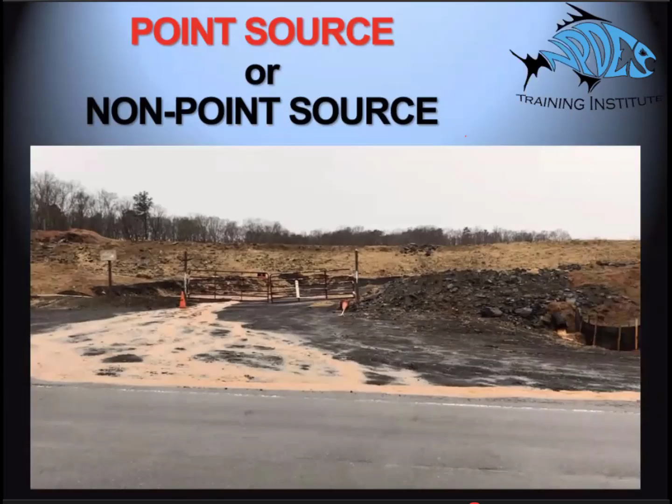Point source or non-point source. This obviously is a non-point source. Non-point sources are not required to file a notice of intent under the Clean Water Act if they have a land disturbance of 1 acre or greater when it's agricultural like this. But point sources absolutely do have that requirement. And yet we're seeing things like this, where discharges are leaving the site. This is just one of countless that I've videoed over the years. That's going down to a creek that will put that sediment into the Chattahoochee River, which takes it down to the next dam, Morgan Falls Dam. That sediment is building up and moving toward the dam as we speak. We're getting a rain event right now.

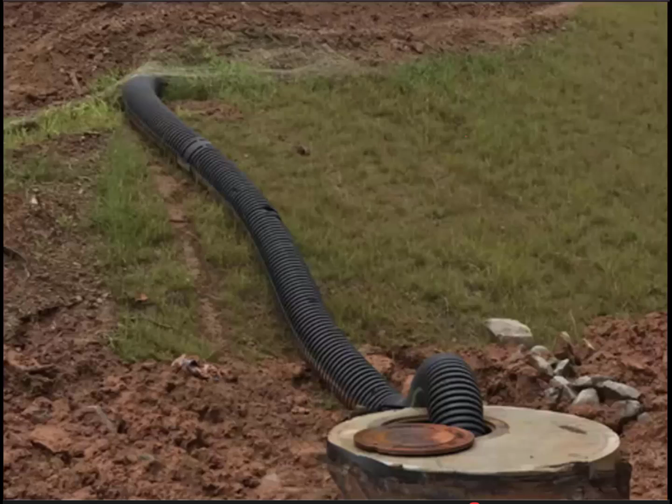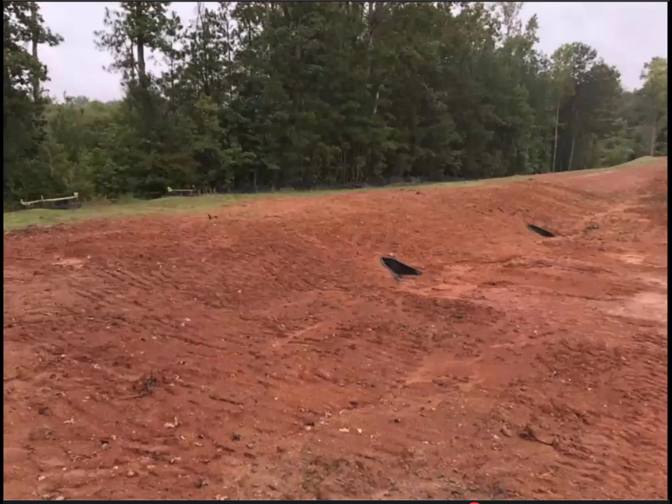So what causes a contractor, and we have to ask ourselves this as design professionals as well, to take a 35-acre site with sheet erosion and the volume of water into a temporary down drain and shove it down to a storm drain? Illegally, obviously. This is a point source of discharge. What causes a contractor, instead of putting the water into a sediment basin with an outlet protected with a retrofit, to just put a pipe in that takes it directly through the buffer and into the creek?

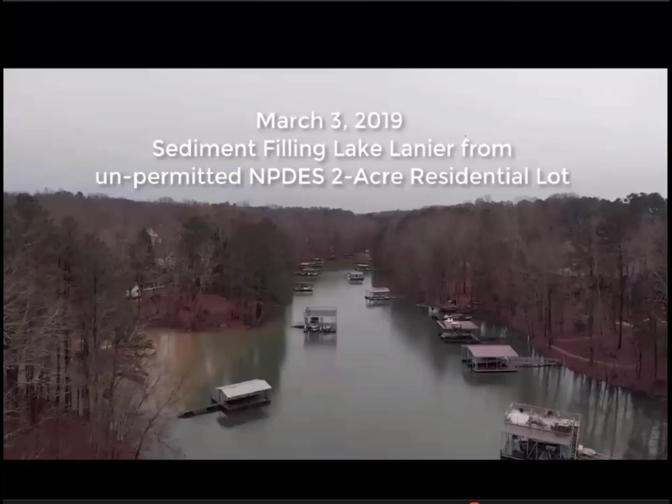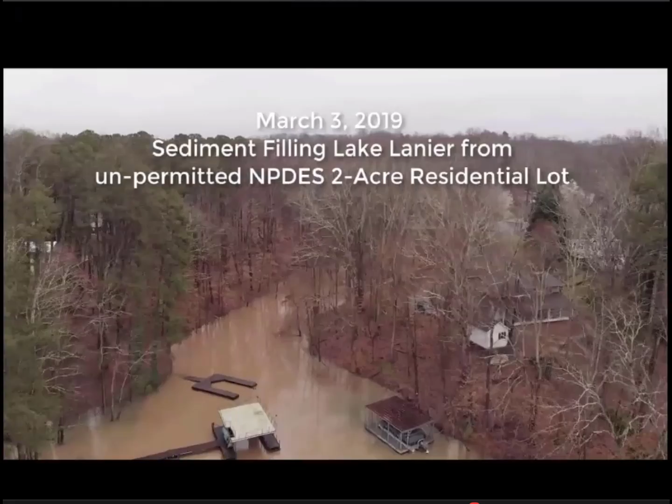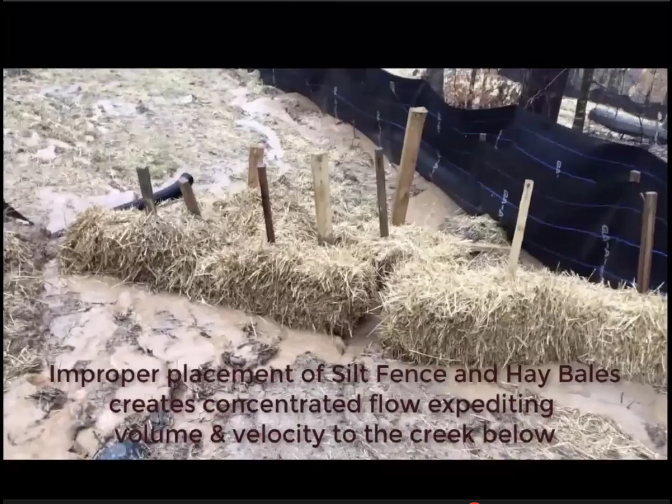What happened was the permittee was not really a permittee. He had gone down to the county, and they didn't even issue a land disturbing activity permit, when in fact they should have required a notice of intent to be filed. That would have required a design professional to be put in place, where even a sediment trap or two would have really helped resolve that issue. Of course, they all have to be maintained, and we'll talk about all that.

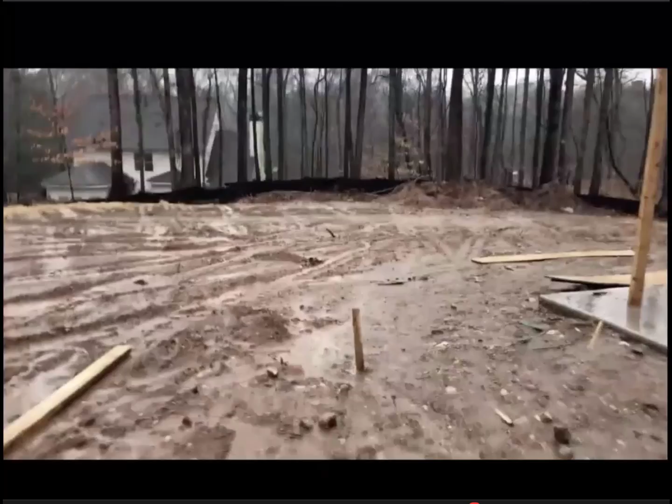But as you look at how even the best management practices were installed here, mulching was at one time over this area, and then of course it sheeted off. It was poorly anchored or not anchored at all. The sheet erosion, obviously, a lot of the sediment's already gone from here, but I kind of highlight that here. But then as that water comes off to the edge of the site, you notice the rills developing, and then the silt fence is channeling the water. And the creek downstream essentially just had no hope of trying to keep itself clean with this discharge. And of course, that all went into Lake Lanier.

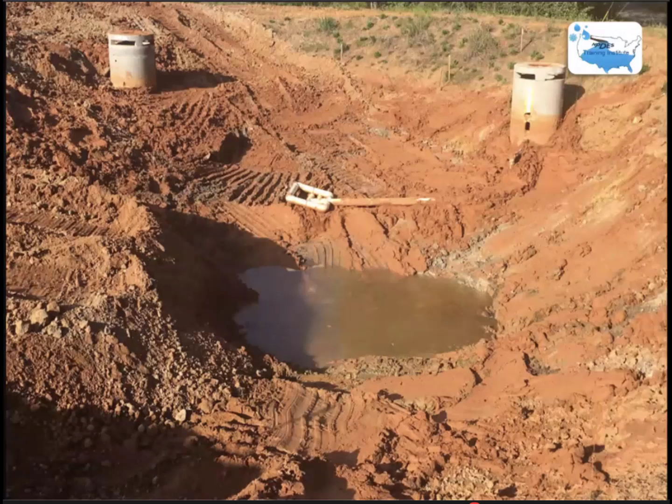So what is it that causes a contractor to do this? These are questions we think we know the answers to, but there's a lot of things that a superintendent is responsible for. And so, part of their responsibility also is to manage these sites as stormwater treatment systems, and lo and behold, they really don't know that.

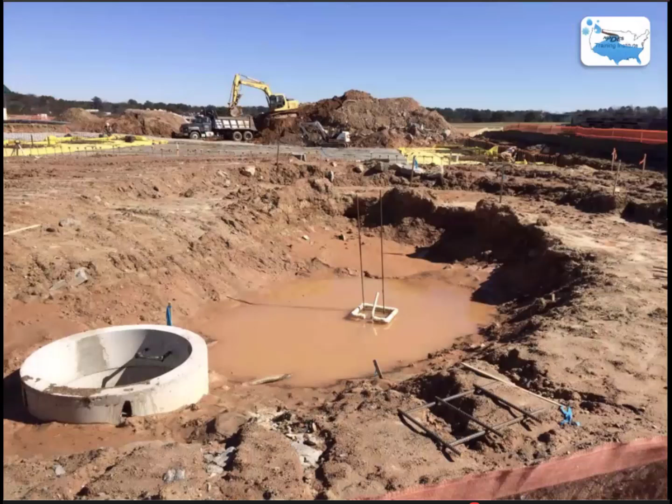So in this particular case, we have a surface skimmer that's installed in such a way that it couldn't possibly be maintained. If it's even operational at this point, it's doubtful. And of course, look at the erosion around it inside of the basin. It's just a rough way to look at trying to manage a skimmer.

So when you take a look at a shot like this of this lake, you can notice the lake in the background is real clear, but here it's full of sediment. And there's really no excuse in the Clean Water Act for this to have occurred.

And as I get to talking more about this, we have to look at construction sites kind of from an idealistic perspective. The Clean Water Act does not sympathize with, your construction schedule didn't work quite right this way, or if it's an industrial facility, there was an accidental discharge, we didn't change the filters out because the guy didn't show up for work last week, he was sick. The Clean Water Act is not sympathetic to that. And it really can't be, because it's people downstream that are the ones that suffer the consequences of this.

A stormwater treatment system, meaning that the notice of intent was filed for these projects, or should have been, meaning that the water hitting these jobs here should have been controlled in such a manner as to prevent that amount of sediment load from leaving them. So, of course, we're seeing a severe degradation of water quality there. And the people that live up in the upper reaches of these bays, their docks are sitting on sediment right now.

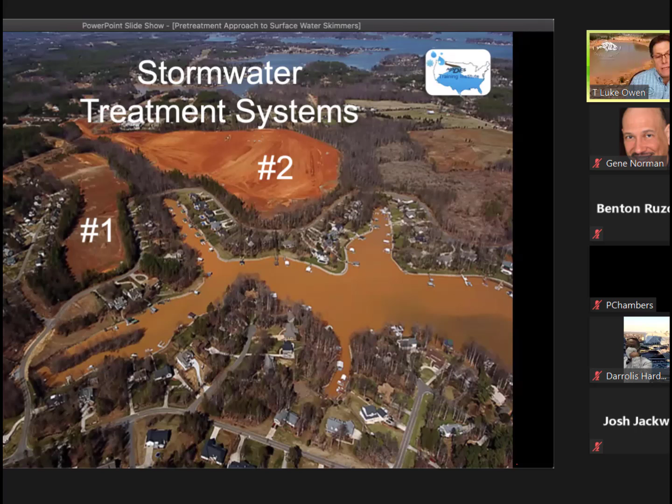So those are two point sources of pollution, where non-point sources like farming, agriculture, largely responsible for trash in a lot of our rivers and our creeks and our lakes in Georgia, for sure. But in metropolitan areas, I really wonder if sediment from non-point sources is our nation's number one problem. I really think in urbanized areas, from what I've seen, and I think you guys would agree, that sediment from point sources is our number one pollutant problem in urbanized areas in states like Georgia, where we get so much rain. And that's really a shame. It really shouldn't be like that.

But it takes training, it takes enforcement, it takes great designs, thoughtful designs that can be implemented in such a way to do more than just meet checklist items, that are going to consider the fact that 27,154 gallons of water are going to hit that construction site on 1 acre. And these are designed for 25-year events. We're talking about 6.7 inches of rain times that amount of water. That's an awful lot of water. So what can we do that's going to address that issue?

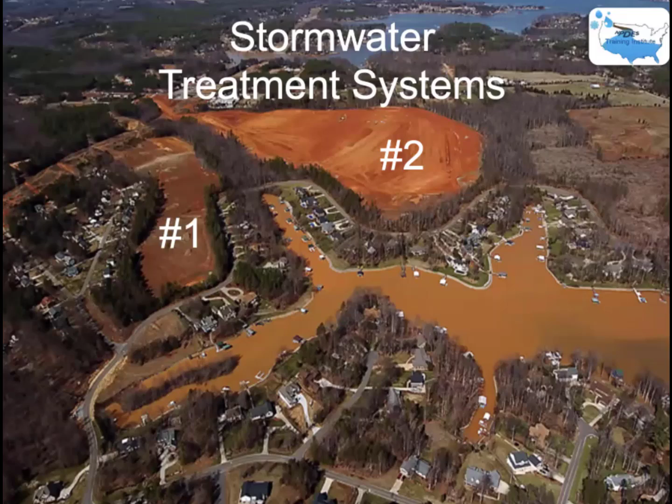And so what I found is that in the Clean Water Act, there is a program referred to as the pre-treatment approach to managing industrial discharges. And I worked on industrial facilities in that program for many, many years. And so it naturally just came to me when I first started this program, we need to start looking at things differently than we do right now with construction sites. So let's go back to the guidelines and start all the way from the federal government. I'll never forget, I was part of the meeting when we walked in the door of the stakeholders meeting for the general permit, and the NPDES said, surface skimmers are here.

What? And I said, what are they? And so here they are. Now they're written into our permits, and they're a federal requirement everywhere now in this country, unless they've been written specifically out for some unusual reason, which in the West, of course, they don't get that much rain there. But the federal law subpart B, construction and development effluent guidelines, come out of 40 CFR part 450, paragraph F.

And what Georgia did is we adopted those guidelines and we put those into our general permit as well, verbatim. So that text in orange says, when discharging from sediment basins and impoundments, permittees are required to utilize outlet structures that withdraw water from the surface unless infeasible. And the commission goes on to say, okay, well, if it's infeasible, it's not technologically or economically achievable, kind of streamline that a little bit.

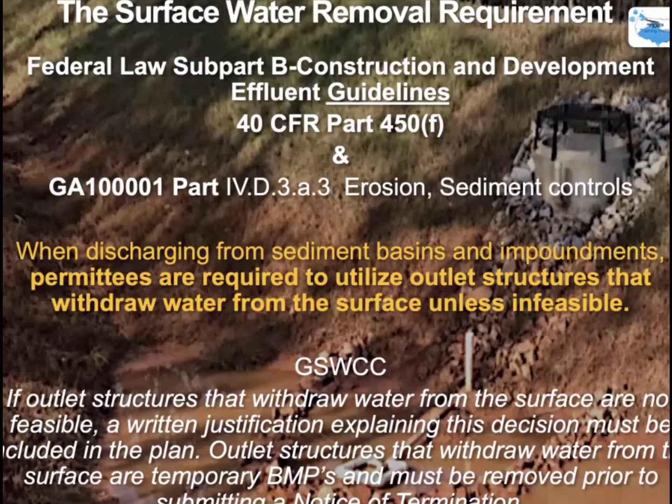So we have to kind of talk briefly about laws versus guidelines. You may have seen that the EPA issued these guidelines in federal law. And when you look at definitions, you really have to understand the difference between law, regulations, and guidelines, and how states adopt guidelines can become law.

By definition, following a guideline is never mandatory unless the state adopts guidelines that are issued by the federal government and requires them to be law. Guidelines are not binding and are not enforceable by law. Guidelines may be issued by an organization to make the actions of its employees or divisions more predictable and presumably of higher quality.

Now, I think surface water skimmers are an important thing to be properly designed, installed, and maintained on construction sites, given the amount of rain that Georgia gets. You know, 55 to 75 inches of rain a year. We have thousands and thousands of creeks and streams.

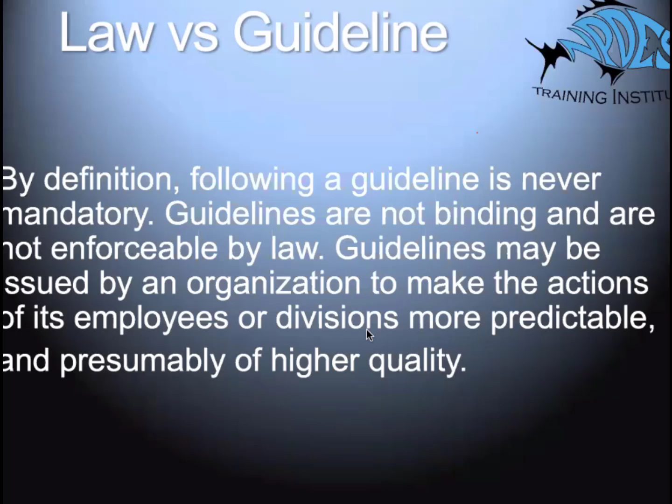I mean, when I moved here from Colorado, Utah, I had no idea what streams and creeks were until I moved here. And many people are born in this state in the Southeast. And as a result, we kind of take for granted the importance of having our streams and our creeks in good shape. We'll talk a little bit more about that later. But let's get into the definition.

A floating surface skimmer, by definition, coming right out of the Green Book, is a buoyant device that releases or drains water from the surface of sediment ponds, traps, or basins at a controlled rate. It skims or dewaters from the water surface where sediment concentrations are at a minimum in the water column instead of draining from the bottom where sediment concentrations are the highest.

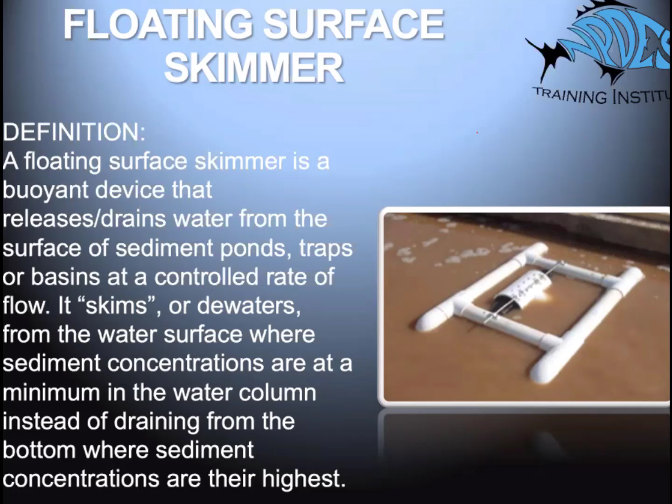Now, when you take a look at the general permit, by definition, this really isn't enough. We can see coming out of the Green Book the definition, the purpose, the conditions that skimmers are to work under, the design criteria. But in our general permit, we have a requirement for discharging to certain discharge limits. Now, this is not business as usual.

For you guys that come in from out of state or that have worked in other states, most states do not have discharge limits associated with construction sites. And of course, the federal government tried to require that a few years ago and they lost.

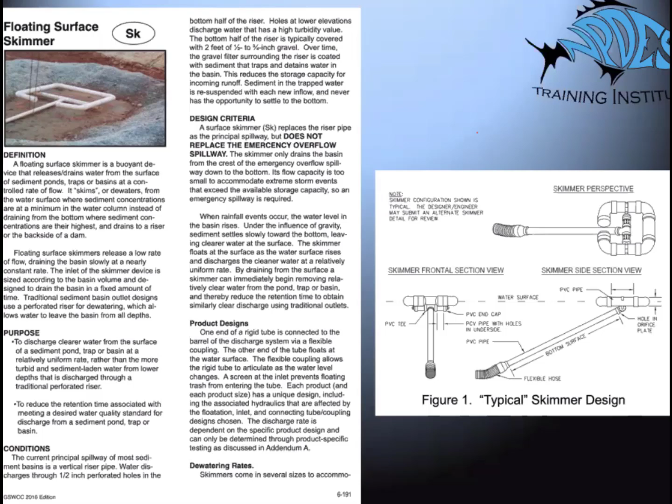But Georgia does have them, and they're kind of not really considered all that important because of how we essentially manage construction sites in a way that does not conform to managing them as stormwater treatment systems. It's really a difference in mindset that has to take place.

In the GAR 1 permit, I wanted to point out here that there are requirements for discharging to a certain limit. And I wanted to read just the first paragraph here. Basically, the first paragraph addresses discharging into a stream that's a trout stream or a warm water stream and measuring turbidity upstream and downstream of those discharges.

The secondary highlighted area there is the same basic verbiage, but addresses sampling from the actual outfall. So what I wanted to point out is in the second paragraph. It says, when the permittee has elected to sample outfalls, the discharge of stormwater runoff from disturbed areas where BMPs have not been properly designed, installed, and maintained shall constitute a separate violation.

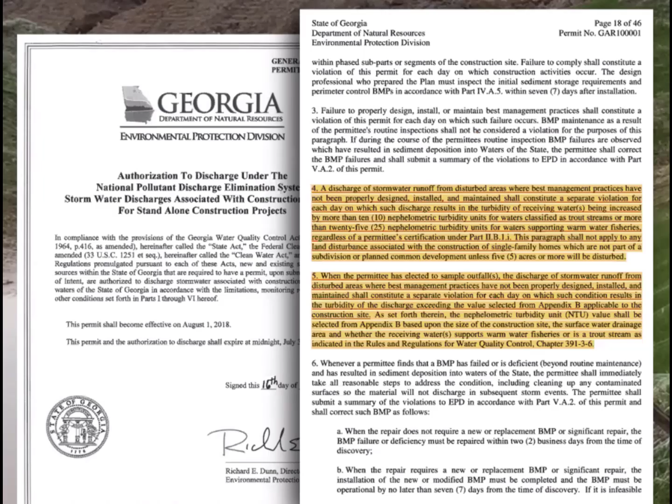For each day on which such conditions result in the turbidity of the discharge exceeding the value selected from Appendix B. And that's essentially the same again as I had mentioned about the 25 and 10 NTU discharges for trout streams.

I wanted to throw this up there. This is not a memorandum of agreement, but a memorandum that came out of the EPD back in 2009. And they address certain things, and it's worth a read.

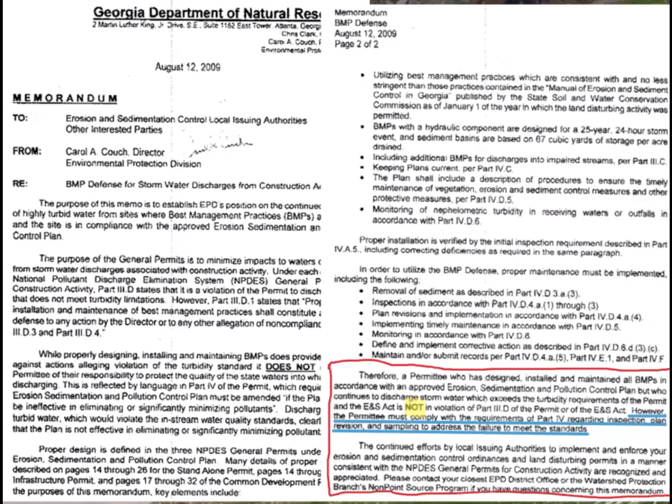Where am I going with all of this? I've put out several times in my newsletters, and I've gotten comments back from very well-seasoned professionals in the stormwater business that skimmers are not intended to discharge to a turbidity standard. And I would agree with that in every state that does not have a discharge limit. That said, as we get into the design, installation, and maintenance of skimmer devices, we have to consider in those installations the ability they have to discharge to a discharge limit.

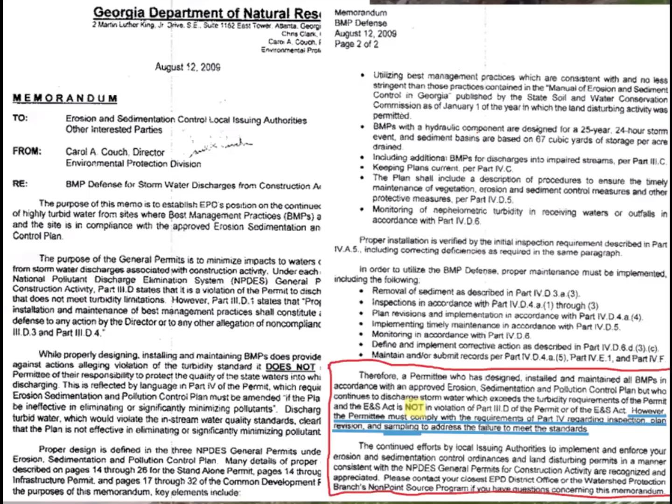That can only take place when you've got certain conditions happening and often would include flocculation. Now in the NPDES industrial world, that's absolutely a requirement, as you'll find out as we start talking more about the pre-treatment program here.

So here we have a skimmer that's not quite skimming from the surface. And here we have a highlight that comes out of the green book that says floating surface skimmers that sink or completely suspend under the water surface are not acceptable. Obviously, this particular skimmer also was inserted through a retrofit.

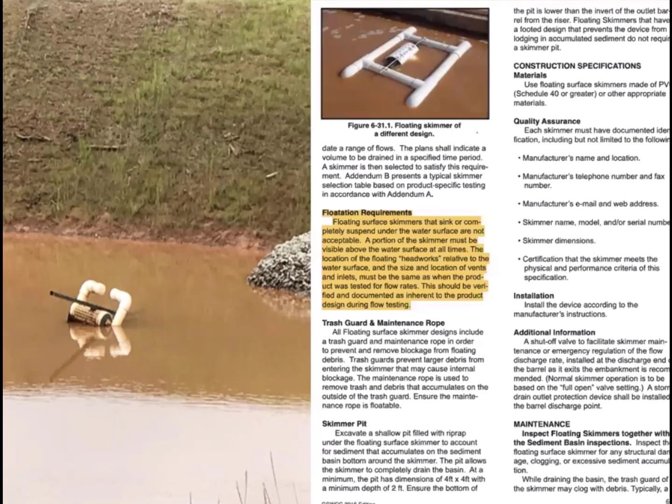There are contractors out there doing this now, and many municipalities are looking at it like, wow, that looks pretty sharp. As a matter of fact, a lot of our BMPs people look at when it's dry and fail to look at them like what's going to happen when they get wet. But where did the concept of pre-treatment come from? It came from the Clean Water Act.

And what happened with the Clean Water Act when it was amended in '72 to include NPDES permits, it had gone on for 25 years and put in water quality standards that nobody wanted to comply with, and there weren't any requirements to do so. So finally in '72, they amended it. A lot of language went into it, and the NPDES permit program was born. Its goals, which still apply today, are very fundamental to America's water quality.

I mean, we can go all the way into bass fishing tournaments. You can go into fly fishing that many of us love to do. And if we fail to comply with the Clean Water Act and take it seriously, understanding that sediment is the #1 pollutant for fish, we're talking about a chronic pollutant that can bury eggs and affect fish gills and breathing in the water, then we've got a problem.

So the #1 goal is to restore and maintain the chemical, physical, and biological integrity of our nation's waters. And that was true then, it's true today. And then we established the NPDES program, meaning the National Pollutant Discharge Elimination System program, that is there to establish standards, whether they're effluent discharge limits, water quality standards, or administrative, structural and non-structural controls that we actually have to put in place.

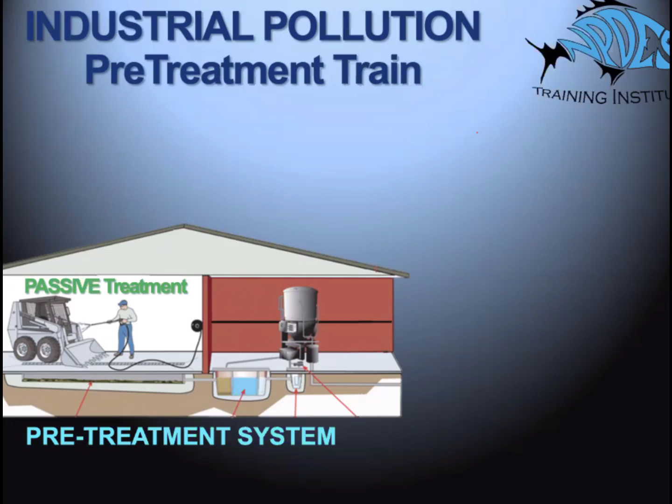So we're using gravity, we're putting things in place that are going to create a higher residence time of that water in the collection pit. You can see a three-stage, three-weir system there that finally will take that water down over to the active treatment system. Now that active treatment system cannot handle the water prior to it being passively treated.

It's impossible. We had the hardest time getting people to maintain these systems. We'd try to sell them the contract to maintain them. They wouldn't do it. They would want to do it themselves. Does that sound kind of familiar to construction sites? It's a human nature thing.

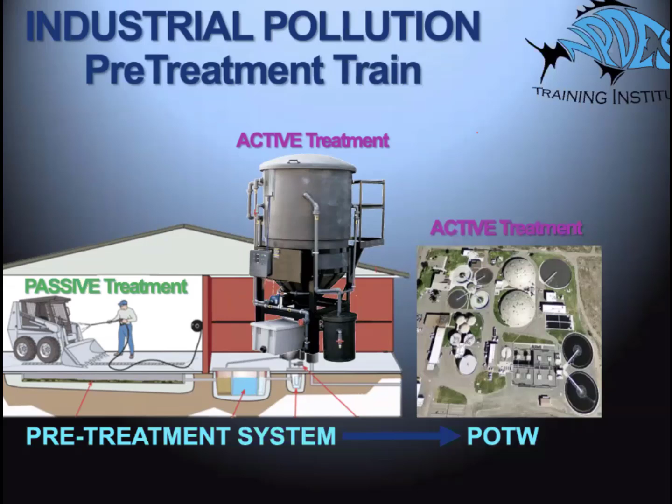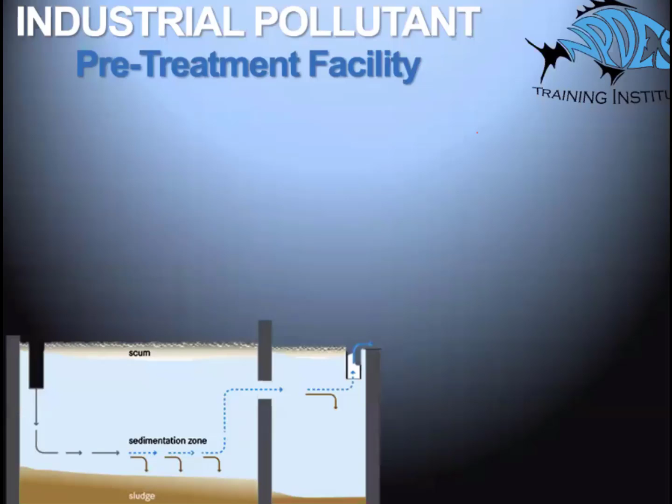So anyway, active treatment systems then flocculate, they filter, they use charcoal filtration to actually kill bacteria. And then from that point, they would discharge it to a wastewater treatment plant, and that would put the final scrub on it that would take it down to the state water or water of the US. Now, if you take a look at an industrial pre-treatment facility, we're talking passive treatment in the collection pit. Collection pits are passive settling tanks built to remove the bulk load of particles from liquid prior to active treatment clarification.

What does that resemble on a construction site? That resembles a sediment basin. That resembles a sediment trap. That resembles a collection area where the water has already got to be pre-treated. A large part of the sediment must be taken out if this thing's going to function properly. And it certainly has to be maintained.

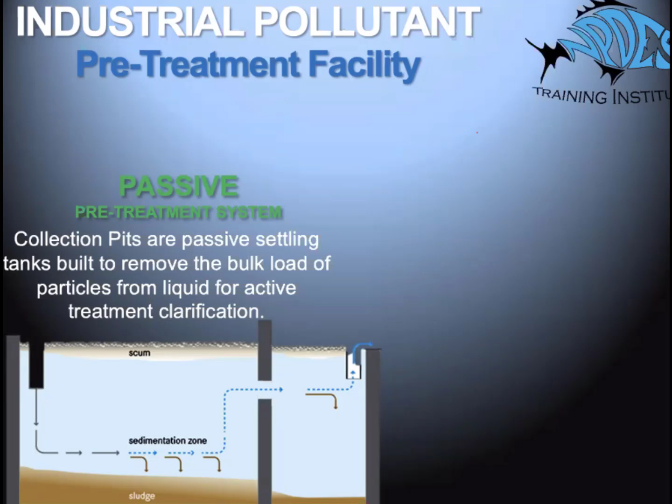When you're talking about the difference of a construction site and an industrial facility, you're talking about a massive difference in pollutant load. The entire floor of a construction site, if it's actually exposed and graded, is the pollutant of concern. And so it becomes incumbent upon the operator of these systems to prevent the erosion of that pollutant from entering the collection pit so quickly, or it simply overwhelms it. From that point on, of course, this is going to be taking it to an active treatment system, and construction sites don't have active treatment systems. Some do.

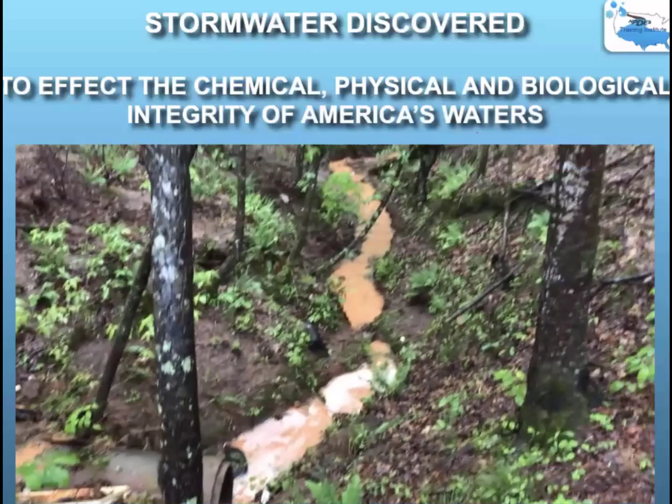But later on, stormwater was discovered to affect the chemical, physical, and biological integrity of our waterways. We have a little solid waste there, but now we have a huge pollutant load coming from a county road project upstream. So as time went on, after the Clean Water Act was amended to include very strict requirements for effluent discharges from wastewater treatment plants and industrial facilities, the EPA decided to study the effects of stormwater, since we realized that the chemical, physical, biological integrity of our nation's waters was not happening.

What happened early on with the Clean Water Act is they decided that it was just not reasonable with stormwater to require effluent discharge limits. And many states in the very beginning, as they're trying to get their arms around all these new requirements, some required water sampling, others didn't. And since then, some have because of active environmental groups and things like that. But for the most part over the country, we really don't require discharge limits.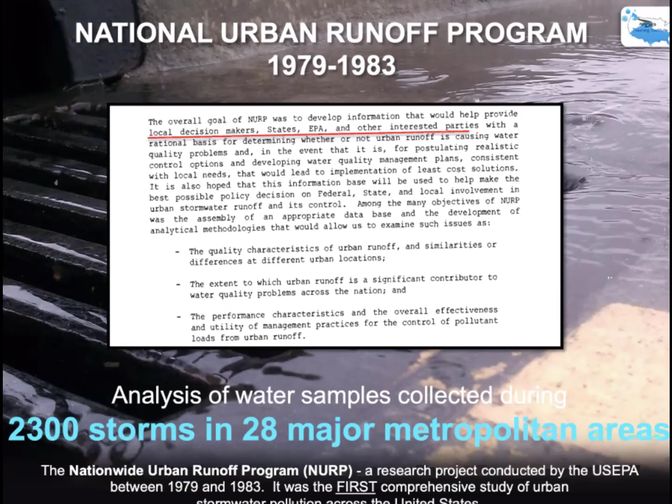But we do require that best management practices are properly designed, installed, and maintained, and that there's proof that that has taken place. That's really what is taking the place of sampling water outside of Georgia. Now, those are still integrally critical in Georgia, but not the only thing. We still have to discharge at a certain limit if we're going to meet our permit requirement.

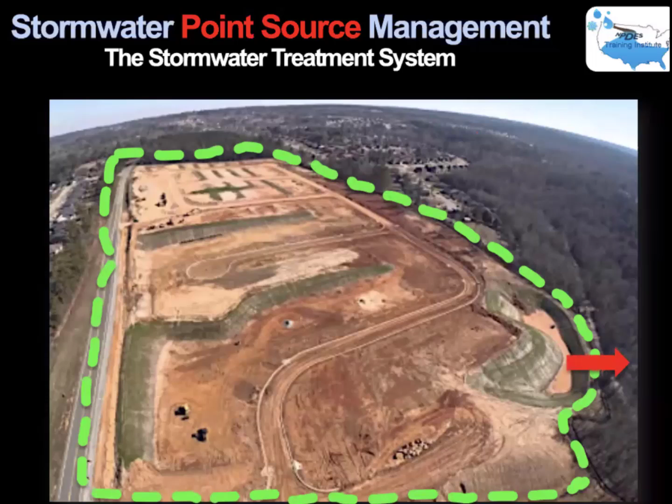And so it's a point source, and how Georgia manages those is to look at this construction site as a point source of pollution, meaning that there's only one legal discharge point on it. The operator managing this is where Georgia goes above and beyond with its certification requirements. Not just inspectors are required to have a blue card, but the people with the financial decision-making capability of calling in an erosion control contractor have those responsibilities to have a blue card. Then people that do site inspections obviously do too.

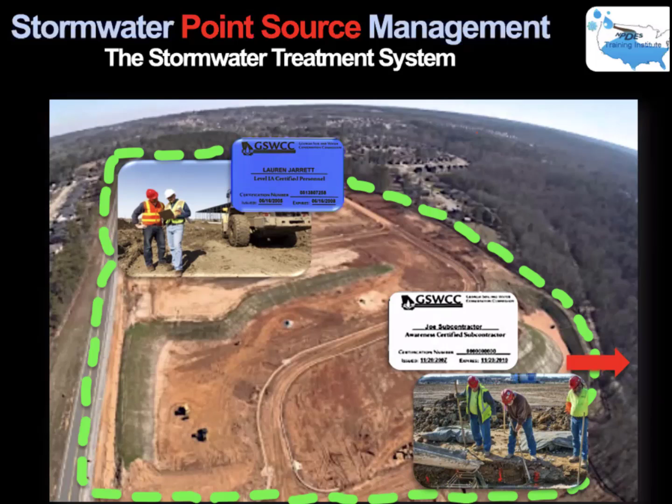And then the subcontractors, they came out a few years after the initial certification program, and that really says, okay, subs, you don't need to know about all this NPDES stuff. You don't need to be doing water sampling and site inspections. You just need to be aware of the damage you're going to be causing to water quality if your activities strip a buffer, or if you don't properly install your BMPs for your contractor. So one person per crew has to have a white card.

Then the red cards come along. They take the same course modules as the blue cards, but they get a little extra because they're regulatory inspectors. Where the blue cards are compliance inspectors, red cards are regulatory inspectors. Most of you guys know this, but there still is a lot of misinformation out there. So anyway, this would be somebody working for a county or a city or the Georgia Environmental Protection Division that is doing enforcement and making sure the site inspections are taking place, the water sampling is taking place, that the reportable violations are being reported, those types of things.

And then, actually fundamental to all of this is the design and the checklist requirements that Georgia has, which are pretty amazing compared to most other states. So here in Georgia, we allow not just professional engineers and CPESC certified professionals in erosion and sediment control to design plans. We also allow those low-life geologists like me and landscape architects, land surveyors, and foresters to actually design plans.

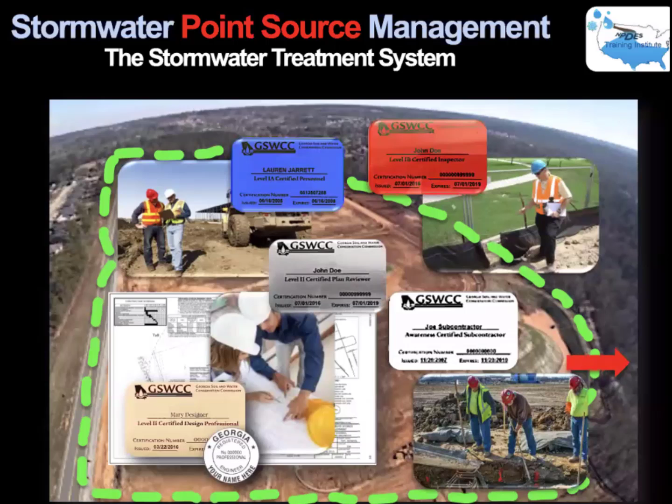And then, of course, plans many times go into plan reviewers. They take the same class. That course takes the same stuff as a level 1A card certified person gets, but they get more in terms of stormwater management, post-construction stormwater management issues. Of course, green infrastructure now is an MS4 requirement, so we learn a little bit about that. And of course, the checklists that we go into, and how to use the BMPs and add BMPs that we want to use on our sites.

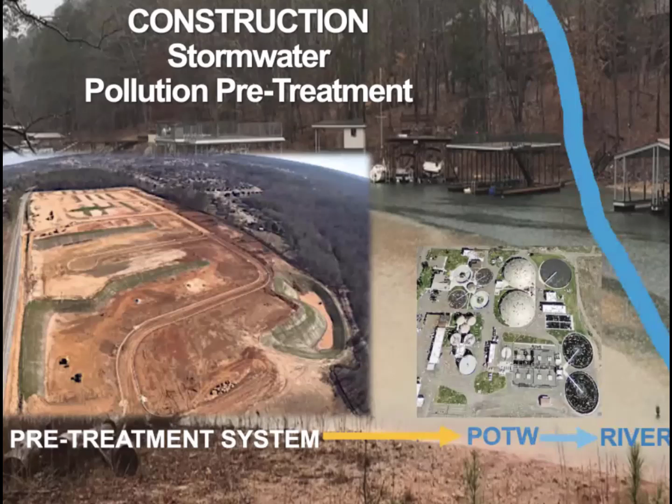So at this point, we're going to start going through the pre-treatment program for construction sites. And of course, we all know that the effluent leaving this site now does not go down to a POTW. It goes directly to the river. So how are we going to pre-treat the water on this construction site in such a manner as understanding it's its last point of discharge? That sediment basin is really to be looked at kind of like a POTW. That's its last treatment point of discharge.

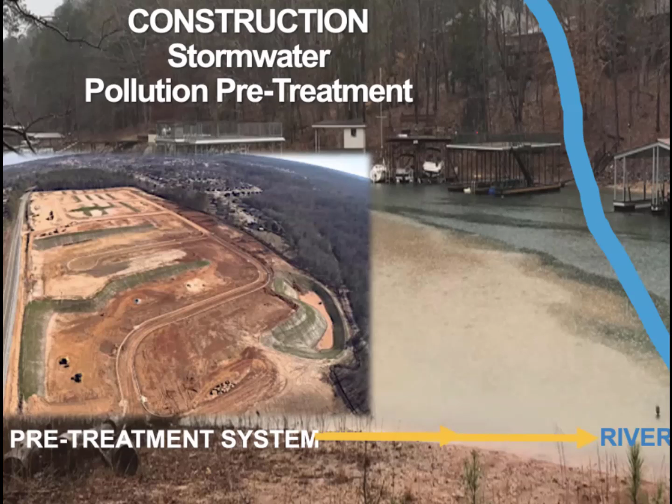What can we do that's going to pre-treat that water to a point where a skimmer could actually work, or maybe even just a retrofit, something that will actually be responsible for discharging water at an acceptable discharge limit? So here we have our challenges on construction sites. We have the increased runoff volume we've got to contend with that industrial facilities don't have to deal with. We have that increased runoff velocity, and we have that increased pollutant load that goes with it. Now, the pollutant load is what people get in trouble for. But these two troublemakers up here in front are the ones that really cause it to be such an issue.

So in our designs, we've got to address it. If we don't address it properly in our designs, then what people are installing in the field is inadequate. And then they're having to come back later on and put BMPs in that'll actually work. And in this case, you can see here where just a huge load actually went and discharged directly into the lake there in the background. So volume, velocity, and pollutant load are the challenges. So what do we need to do?

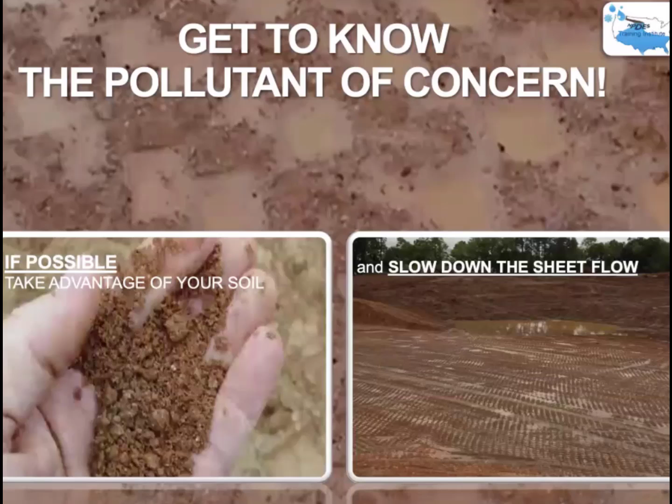As a design pro and even as a superintendent or a site inspector, we actually need to understand the conditions of the soil. Is it a saprolitic type soil and eroded bedrock that's really grainy, kind of sandy, and allows for water storage to some effect? Is it going to be real erodible like sand on a slope, or is it going to be finer silts and clays that are not quite as erodible as a sandy soil? And of course, understanding the different types of erosion, we have to understand that sheet erosion is the #1 source of most of the water that picks up that sediment load. That's our challenge really on a graded construction site.

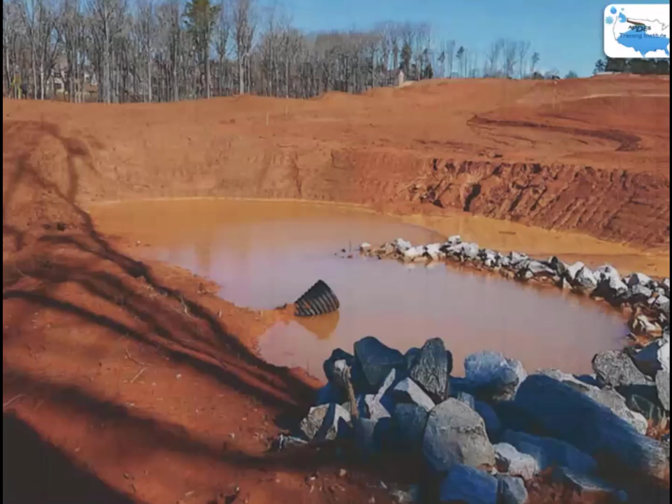So as we start to get into the need for managing stormwater on a construction site, we have to address sheet erosion. And that takes a proactive approach of stabilizing soils. Here we have an example of just a graded area, small little lot in Beaufort, that's discharging a phenomenal amount of sediment off-site, going right straight down to a storm drain. So what we have to look at on an NPDES site is, first of all, looking at this collection pit in such a way that's going to prevent the sediment from getting into it, and then what's going on in the collection pit. So erosion prevention first has to be considered, and then sediment control upstream of the collection pit.

Then in the collection pit, like on an industrial facility, it's concrete. It's got weirs in it. It's not going to erode. But on a construction site, we have to properly stabilize our slopes. We have to properly stabilize the outlets that are discharging water inside of the sediment basin. And then as it leaves, we have to consider the water being discharged from these concentrated flow areas. So we have to prevent the erosion inside of the basin, as well as control or expedite sediment deposition as quickly as possible. And in this case, of course, they didn't even have an outlet that was adequate here. So before the collection pit, we need to prevent erosion. What's the very first way of doing that?

If I had time to ask questions, the very best way would be to leave all the trees up. But that's not going to work on a construction site. So the next best thing... Stabilization. There you go. Okay, thank you. Stabilizing it. So how do you best stabilize?

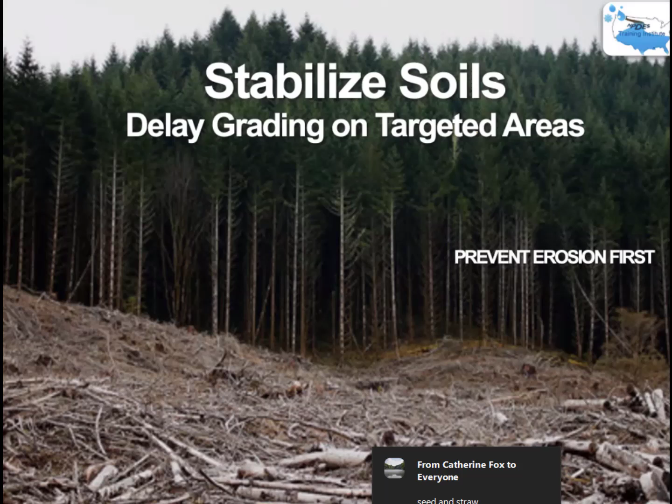Well, first of all, if we properly phase our projects, and this is where it comes into the community of setting budgets for the construction sites. Communities that are proactive with requiring the installation of perimeter controls first before they take down the trees, people go into those municipalities ready with a design and a budget to handle that, because they know there's going to be enforcement. But for local authorities that don't enforce this kind of thing, it's going to take a burn-in if you decide to change your way of enforcement.

I mean, look at this. They went in, they took down all the trees, but they're not going to be grading here for another 3 or 4 months. There's no reason to start grading this right now, other than to be considerate of remobilization costs and things like that. To a certain point, construction sites or stormwater treatment systems need to be sympathetic to construction sites, but we've got to be a little more proactive than what we're being right now. I think you might all agree.

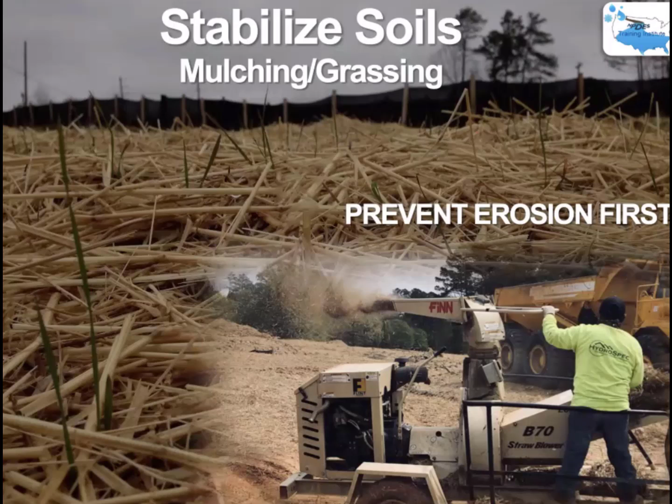Of course, soil stabilization, here's a great example of that. But even as this gentleman's blowing a lot of mulch out there, there was no effort to anchor that mulch. I've seen more damage from down drains being plugged with mulch, mulch sheeting off and virtually being just useless with a minor rain event. Why even do it is my question. Why even pretend when it looks dry and it stays there? That's not its point. It needs to work when it's there. It needs to be anchored, and that grass needs to be anchored.

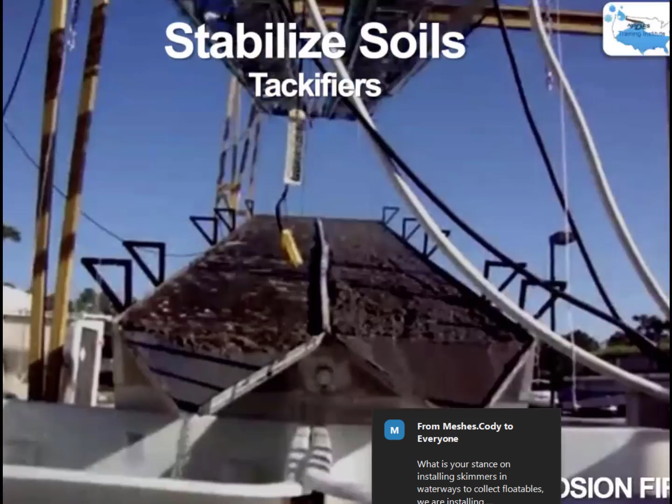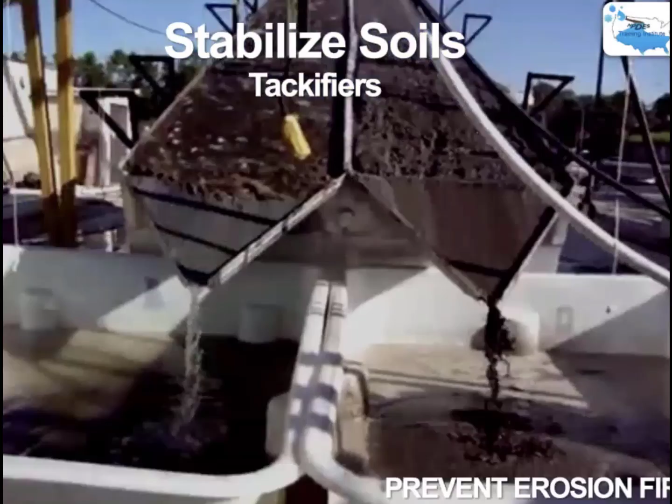Something I think is an underutilized best management practice that Georgia authorizes is polyacrylamide, anionic polyacrylamide. And this is just from a Florida Stormwater Conference years ago, but it shows you the effect of basically spraying a polymer, whether it's emulsified or a powder polymer. Here they've got a fine jute membrane over it to kind of hold the soils in place, but basically it kind of puts a clear plastic film over this. It's just sheeting off the water, where the other side is, of course, going to create all kinds of damage to the treatment system itself and probably leave the site.

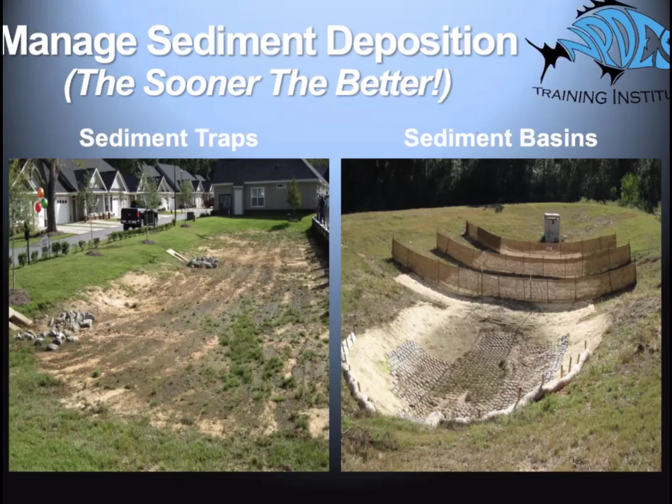The discharge management devices, the emergency spillway, the surface skimmer and level spreaders, all those need to be considered here. Managing sediment deposition, the sooner the better, is really important. And so, of course, we talked about preventing erosion, the sooner the better, grassing, mulching, making sure it works. And then as it comes and encounters structural measures, we need to do a really good job at trying to expedite that sediment deposition. And then, of course, that's going to take a lot of maintenance to do that.

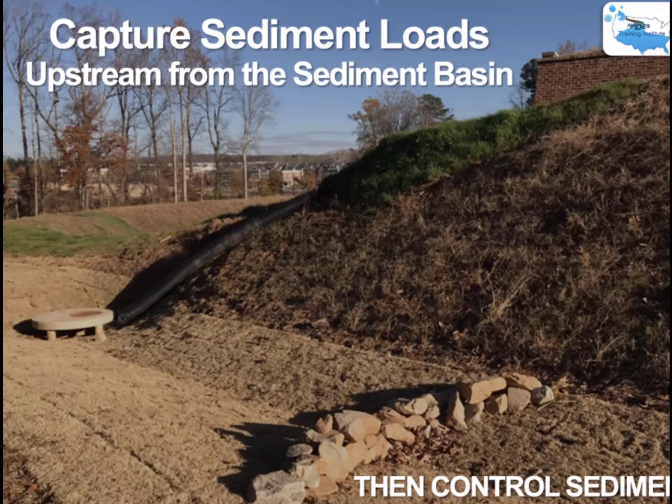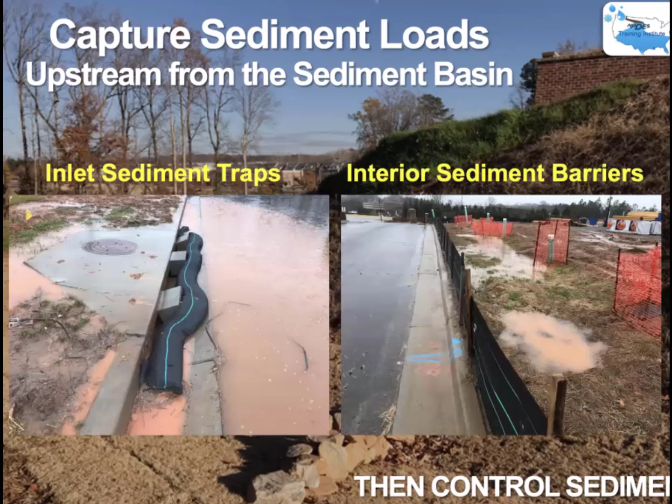So here we have a great stabilized channel. We have rock riprap taking it down to a storm drain that's actually going to take it down to the sediment basin there. Here we have an inlet sediment trap that's doing a fine job of keeping sediment from going into it because that's a direct outlet going into the basin. And then perimeter silt fences here in this particular case have been doing a great job of keeping the sediment from getting into the street that would take it to a storm drain inlet.

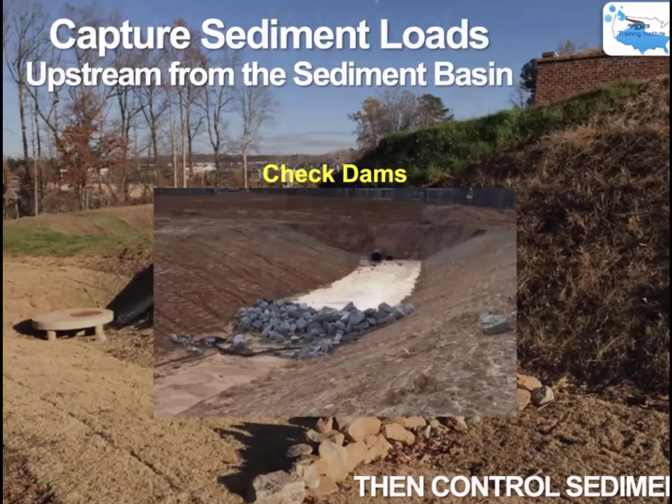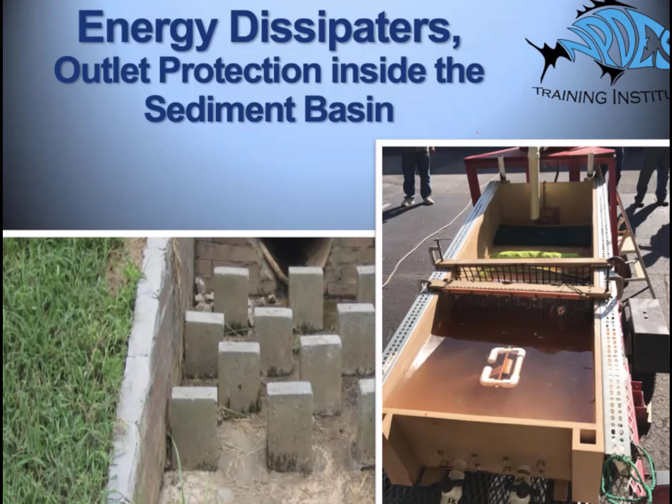And so the characteristics of the best sediment basins, we have to understand the pond dimensions. We're not going to get into the details of that. Flow circulation patterns have to be considered. These are things that design pros really have to take seriously when they're putting together the designs for basins for collection pits. Construction components and your discharge management requirements.

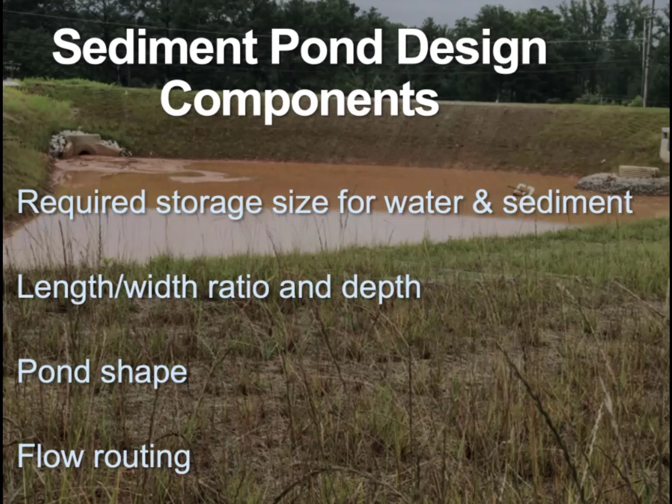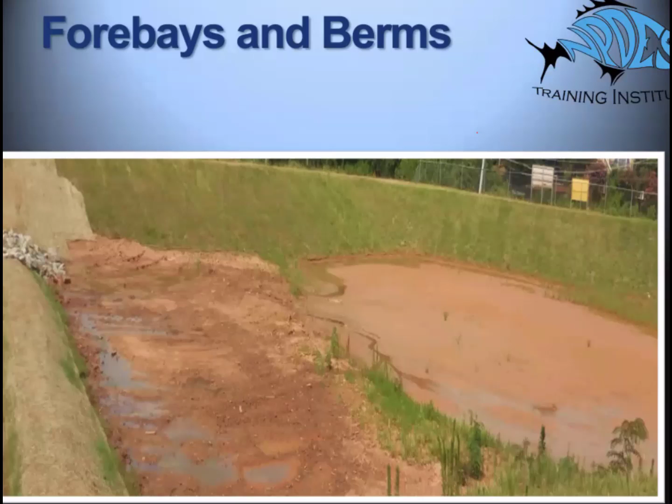Required storage size. How many sites have you seen where people have minimized the size of their detention ponds or not put them in at all? Length-width ratio, depth, really important things to consider. Here we have a little forebay. It's capturing higher sediment loads. That takes a lot more maintenance. And then as water pours into the rest of the basin, of course, that's going to be taking it to the outlet.

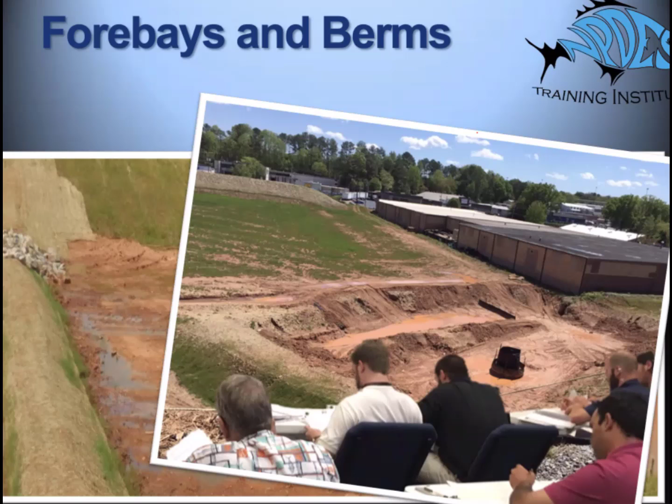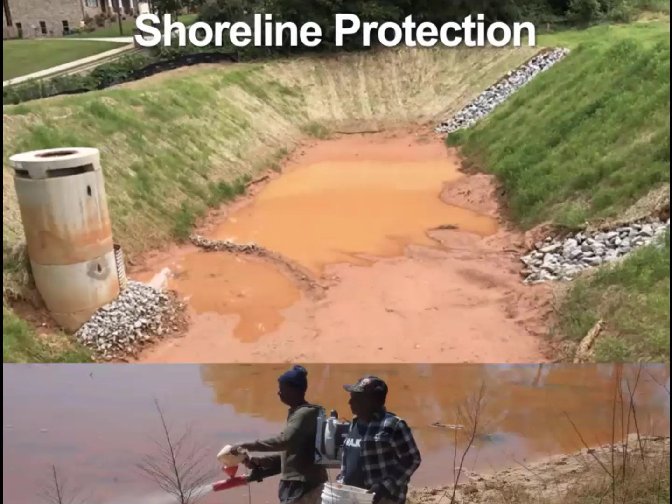Here we have kind of a baffles situation where they've actually used the soil to create a higher residence time. It would help if that soil was certainly blanketed on top there, but they've done a good job of creating a higher residence time before it goes to the outlet. And here we have an example of what we can do to stabilize the outer edges of our basins by using a polymer and grassing so it doesn't erode in and of itself.

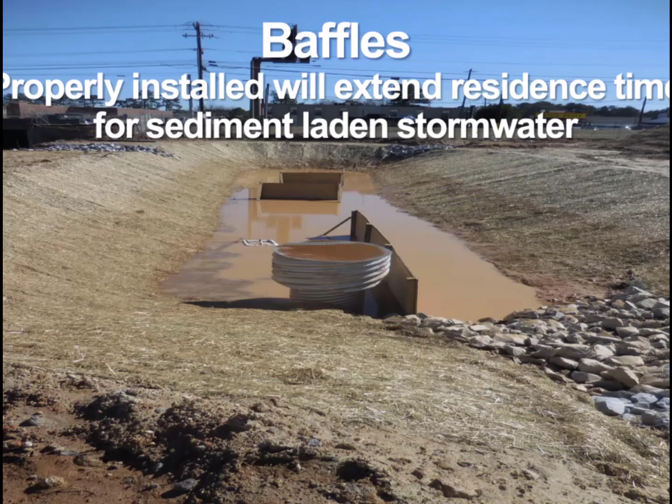But something else I wanted to throw out, again, Jim Spott's name, he really showed me a few things when it comes to skimmer devices. I wanted to close with this: you've got to have flow control. You cannot expect a skimmer to properly discharge really clean water. Of course, much heavier sediment loads would settle automatically, but while water is circulating during a rain event and rushing into that pond, you're going to get a lot of suspended sediment that you could wait to settle out.

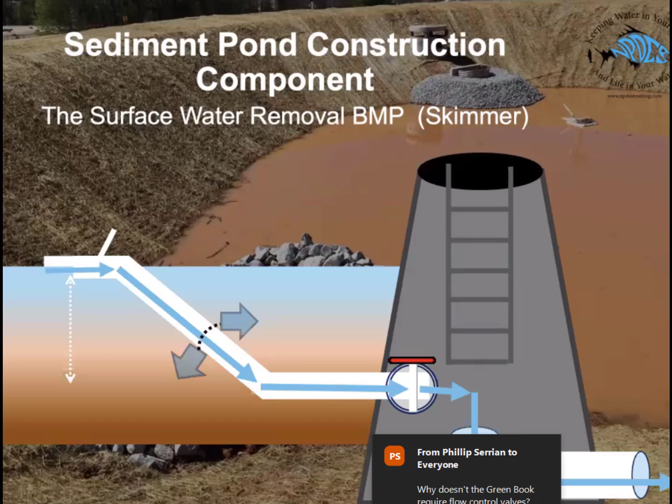So if you put a flow control valve on it, you keep it shut off all the time. Open it up when the rain event stops, after about 48 hours, a couple of days, and let that sediment settle out. Then you get cleaner water discharges. And you certainly can expedite that sediment deposition in the basin if you use a polymer, in different ways of applying that. There's two typical skimmers that we use here, but there's all kinds of other outlet devices you can use. I'm going to move through here because we're getting limited in time.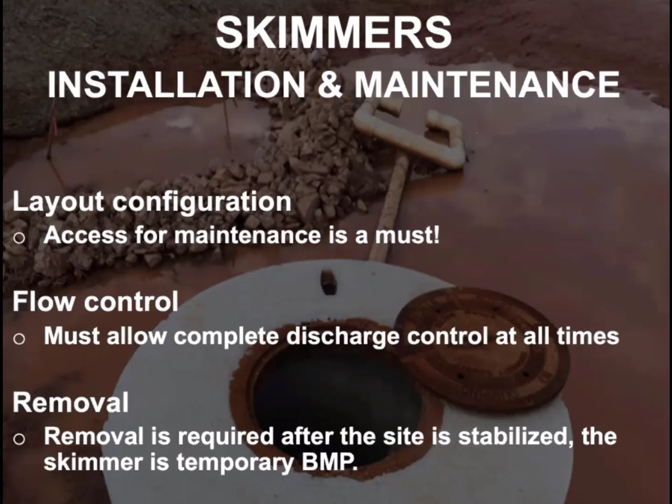But layout and configuration is a really important consideration, making sure that your skimmers have a flexible hose that's going to allow it to operate correctly. Making sure that the flow control is completely managed by the permittee and/or the inspector working for them, so that they don't just allow that skimmer to discharge during all intervals of a rain event. And then, of course, removing it at the end of it.

Again, just revisiting this, the rigid tube must be long; discharging the pond within 24 to 72 hours is a requirement. And discharge rate is irregular when the height of it is less than 6 inches. So what happens with these devices, if you haven't maintained them, they get super heavy. Sediment is heavy, and you've got to place them to the side of a basin that allows for them to be maintained. In this particular case, you've got to be careful what you're skimming.

And when you have a requirement like the National Pollutant Discharge Elimination System has for construction sites of making sure that spills are picked up and cleaned up immediately, sediment that is below a diesel tank in this case was leaked on. When it rained, it carried that sediment with the mixed diesel into the sediment basin, and they're skimming it right directly off into the basin or into the creek. So you've got to consider things like that. Discharge during inflow is definitely ineffective.

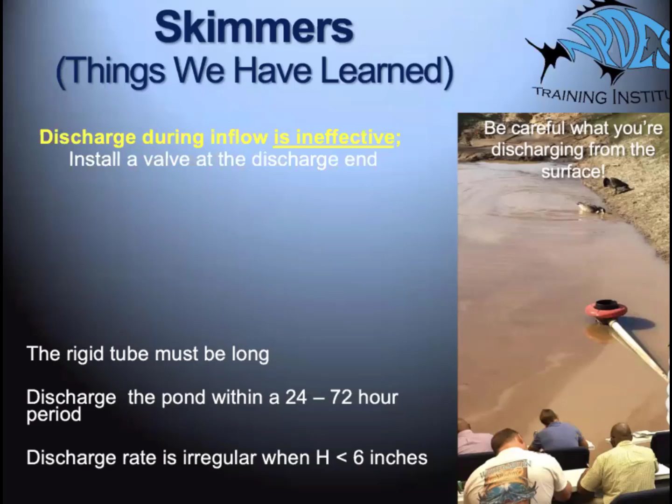And I know what's probably going through the minds of so many of you, it's the same thing that's gone through my mind: what's practical here? Who's going to establish practicability anyway? I think we as professionals, we've got like 300 of us in this course. And if it's not us that take this stuff seriously, then the construction community sure isn't going to.

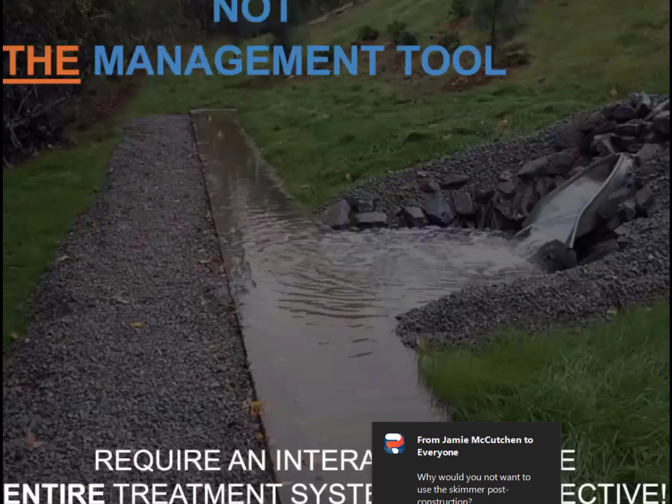And the construction community's got its challenges big time with managing stormwater and building a site to be profitable. But we need to be working together to come up with solutions that are going to be protecting our watersheds in a way where we can still fish in them when our kids are here and we're gone. We have to understand that that's an important, critical part of the Clean Water Act.

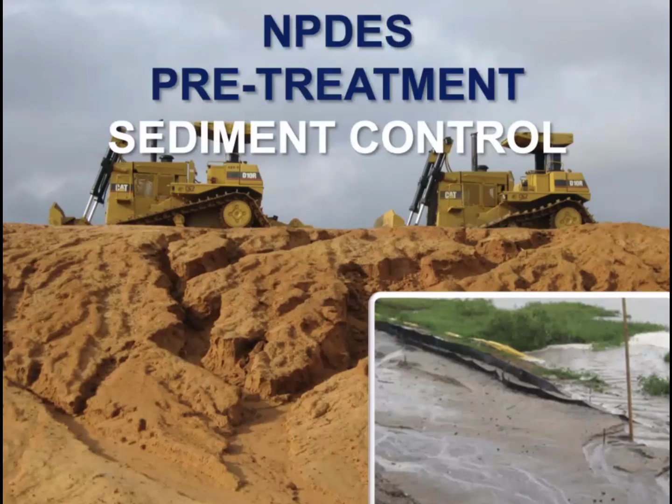So pre-treatment, absolutely critical. So we have to prevent erosion first, manage that sediment second. And if we kind of go through that process, then skimmers can work. We can flocculate that water, it's not full of sediment, they can absolutely work.

So in closing, I kind of sped through a lot of this stuff here, but I wanted to mention something about Theodore Roosevelt. He is kind of my hero when it comes to conservation. He was actually a proactive president at a time when people weren't trying to destroy our environment, but they weren't wanting to protect it. They were wanting to privatize the Grand Canyon and the Smoky Mountains and things like that.

So when he was going for president, he had many, many statements. And one particular one is my favorite, says, conservation is a great moral issue, for it involves the patriotic duty of ensuring the safety and continuance of a nation. And if you want to see countries that I've seen when I was overseas and how they did not manage their pollutant loads and their erosion, they've destroyed their economies.

We have got to step it up when it comes to how we manage stormwater on construction sites. And in states like Georgia, where we have so much rain, we have the regulations in place. There's really no excuse for us to be managing the water the way we do now. I think skimmers are a fantastic device, but just like every BMP out there, we need every design professional to be doing their job. We need every installer to be doing their job properly, and the maintenance is absolutely critical. Not one job is more important than the other.